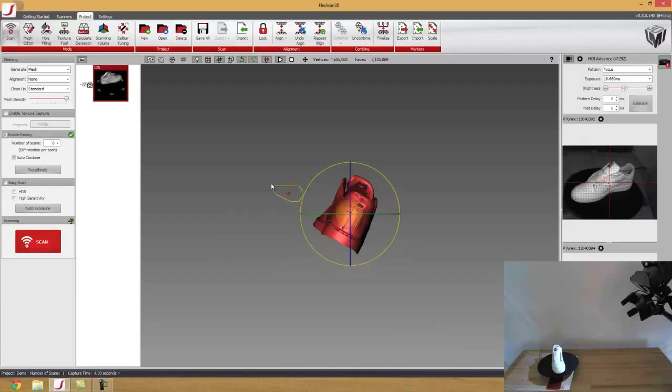So now it's done, let's take a look at the data. It looks pretty good. Looks like it caught some of our table and a little bit of the sheet. So let's take a look at it. Really crisp, really clean data. You can see the stitching on the Nike symbol and the stitching in the other places on the shoe.

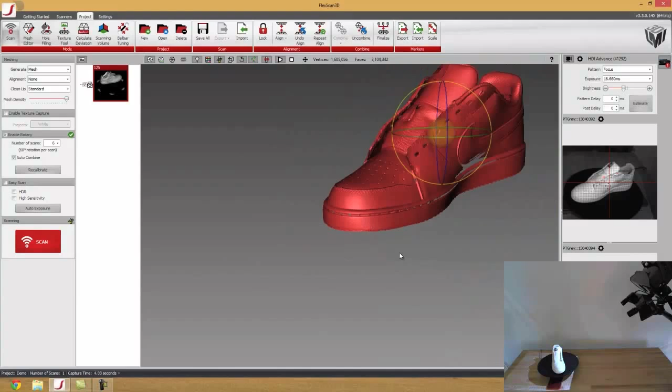We come up here, we can see it got the perforated holes on the shoe on the tip of the foot. But we're still missing the bottom profile, and that's pretty easy to get. All we really have to do is flip our part on its side on the rotary stage and take another set of scans. So let's go ahead and do that and press scan, and it'll run through the exact same process that I described earlier. And once it does, we'll go ahead and we'll begin aligning.

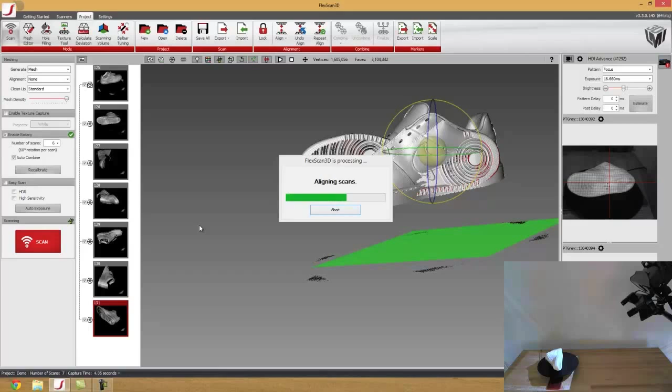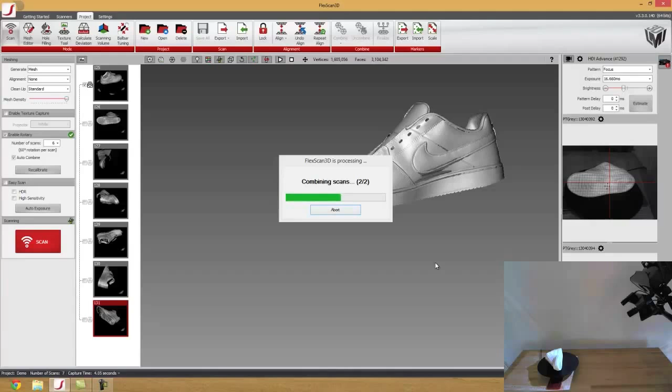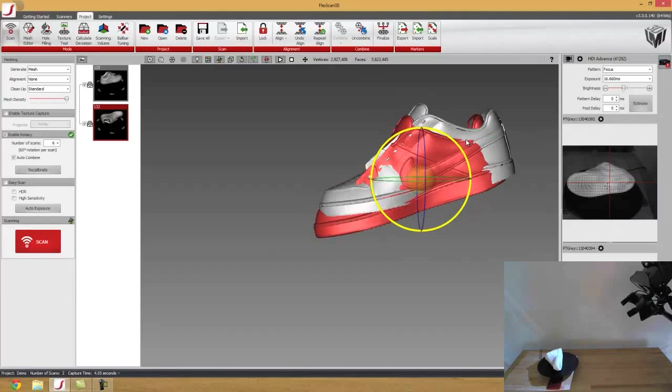Alright, so it's going to combine our scans, and once it does that, we can begin the manual align process. Alright, so let's delete the data caught from the table, and let's do this. So to manually align two scans together in FlexScan, all you have to do is get it in the same orientation as the other scan.

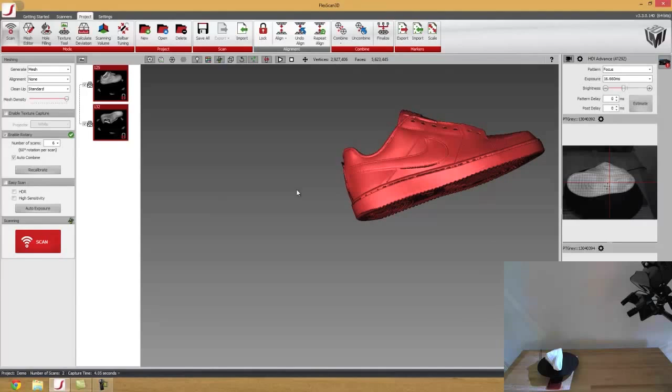The way the manual align process works is by a process of picking similar and overlapping scan data and kind of meshing it together. So I've just aligned the two, and that's pretty close. So I'm going to go ahead and combine the two scans together, and once they're combined, we can run through the finalization process.

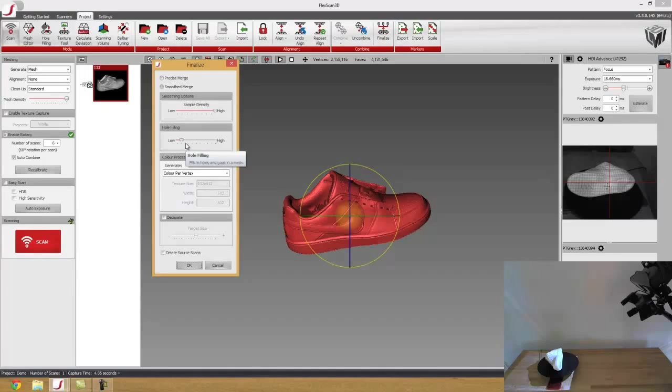Alright, so last thing you would do is press finalize, and we have two options, a precise merge and a smooth merge. Precise takes all data as is and does not alter it, while smooth merge smooths out some of the rougher spots in it. I'm going to use a smooth merge for this object, and I'm going to use the hole filling option. And I'm going to go ahead and click OK.

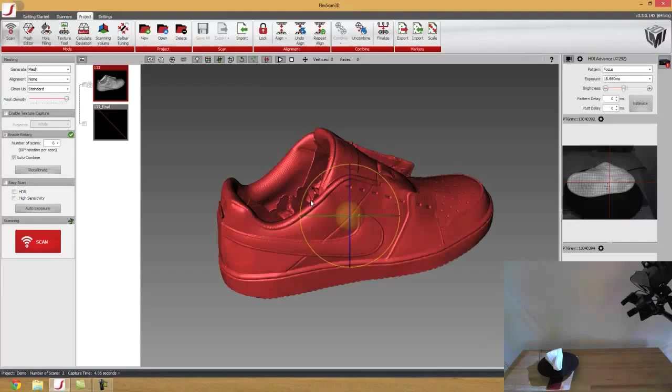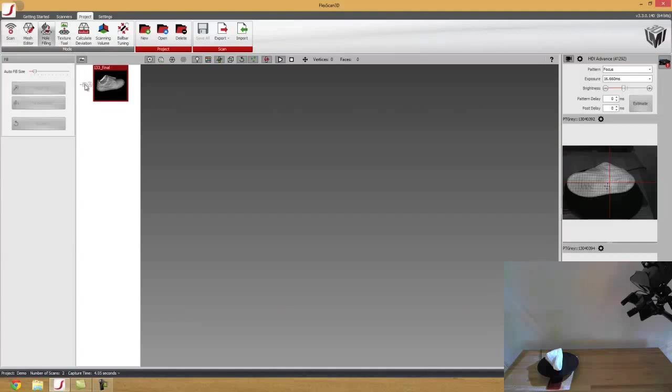Alright, so now that that's done, it's pretty much ready to be exported out as an STL. One thing to note though, sometimes you will have holes still left in your mesh after you finalize. FlexScan offers a very useful feature called hole filling, where all you have to do is just load it in and select your holes, and it'll fill all of the simplest holes, and then the more complex holes like that you would have to fill in yourself using a bridge method where you just click and drag between the two and then fill it in.

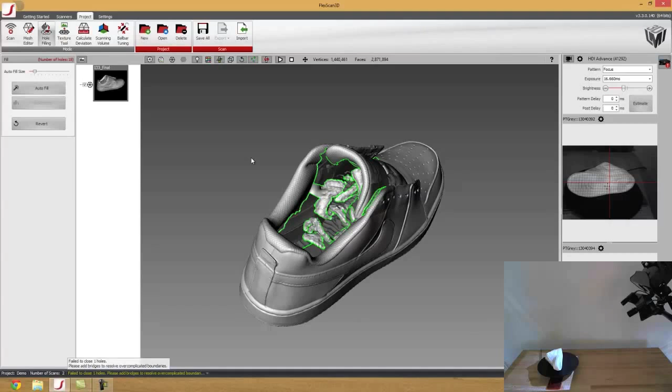So that's all I'm going to show you, apart from the last thing, which would be exporting it out, which really is just a click of a button. So you have your scan loaded, and all you do is click export and choose a file location and press OK. And that takes a couple of seconds to export out.